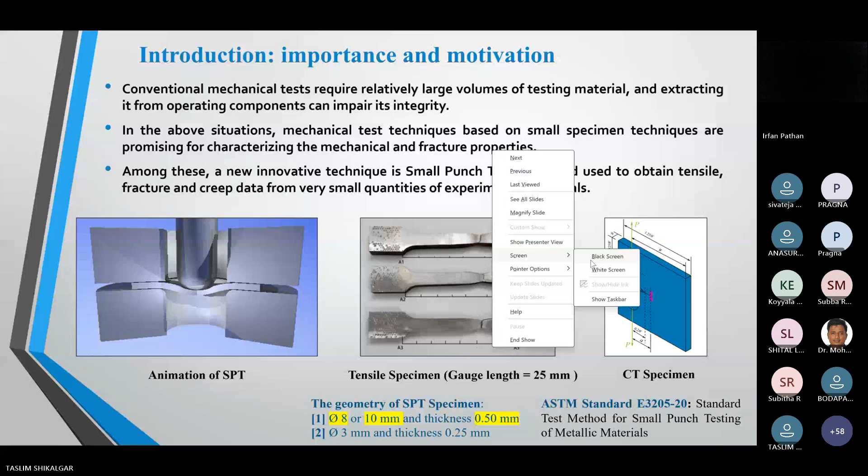This animation shows the small punch test, a disc type specimen having 8 mm or 10 mm diameter, 0.5 mm thickness, which is fixed between upper and lower dies while a punch deforms the specimen. With the help of this deformation, we get experimental data, the load versus displacement data. Many researchers use this data to get the mechanical properties.

Here you can see these tensile specimens, having a gauge length of 25 mm. I want to show a comparison: if we use that much material to get tensile properties compared to SPT, SPT specimens can be manufactured from this type of specimen. More than 100 specimens can be fabricated and tested, and you can generate a parametric study based on these specimens.

Here I took an image from the internet. This is the CT specimen, used to get fracture properties, and these specimens also need more material. So these conventional tests require a large volume of testing material, and if you extract these specimens from working components, it can impair their integrity.

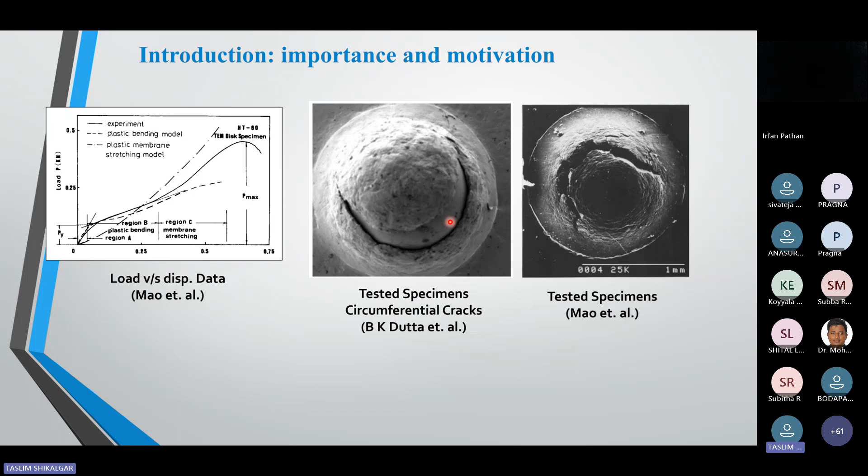Advantages and disadvantages: this type of specimen can be used to monitor changes in material properties of in-service components, and it is easy to perform the experiments compared to standard experiments. This testing methodology can also be used to study changes in properties of irradiated or aged materials.

But one major disadvantage of SPT techniques is the absence of a crack in the SPT specimen. So we are unable to get fracture properties, and there are no exact relations between SPT parameters and actual mechanical properties of the material, like between yield strength and yield load, or ultimate tensile strength and maximum load. There is also no direct determination of fracture properties with conventional SPT specimens, so we are unable to determine damage parameters, which are important to find the initiation of fractures or whether they lead to ductile or brittle fracture.

So now the upcoming methodology is the pre-cracked small punch test. Here, a few researchers increased the dimensions of the specimens from 8 mm to 10 mm into 10 mm, with a thickness of 0.5 mm. They introduced a notch or crack. Both terminologies are used in the literature; sometimes people call it a notch, sometimes a crack. But for a fracture mechanics approach, you need to call it a crack.

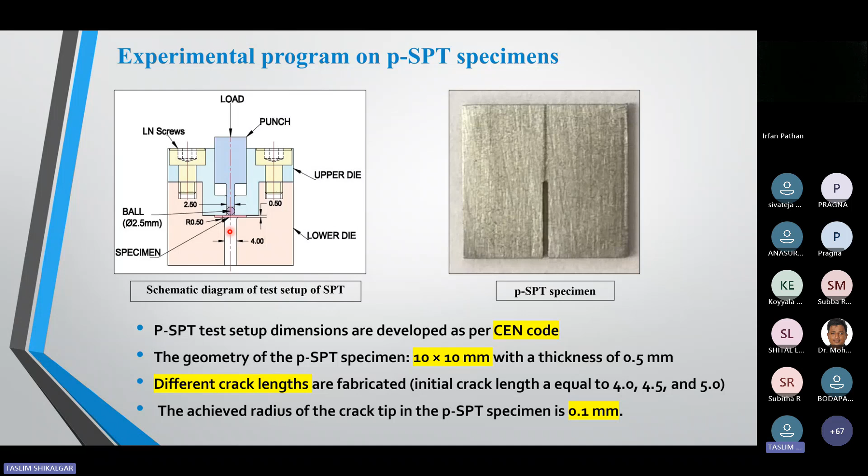Now people are working on this; they are using an endoscopic camera, passing it through the bottom hole to observe how the crack is opening during testing. That is upcoming next time — right now I am also working on this methodology. Next time I will arrange a lecture on how we can utilize this, and I will give more details.

Now we will discuss this. I got these 3 types of results from these 3 types of specimens, and I want to utilize this test data to get the fracture properties. But from this load displacement data alone, I don't have the correlations needed to obtain the fracture properties.

So I cannot use this directly. For that application, I need to first develop the empirical correlation. So based on this data, I need to figure out how I can utilize this test data to get the fracture properties.

So I decided to use a numerical methodology like finite element analysis. I generated a similar FEA analysis model. I meshed the symmetrical model because I cannot use a 1/4 model, since I have a crack in the specimen, so I am getting only a half symmetrical specimen.

I meshed this model, and here you can see this near the crack tip. I meshed using a brick element, meaning an 8-noded element, with a full integration approach.

I did the FE analysis of these specimens with the help of the tensile properties, and then I got the FE results from these specimens, only load versus displacement data. I compared my numerical results with the experimental results, and based on these comparisons, I developed two additional correlations: one between crack length versus peak load, and second, CTOD versus peak load.

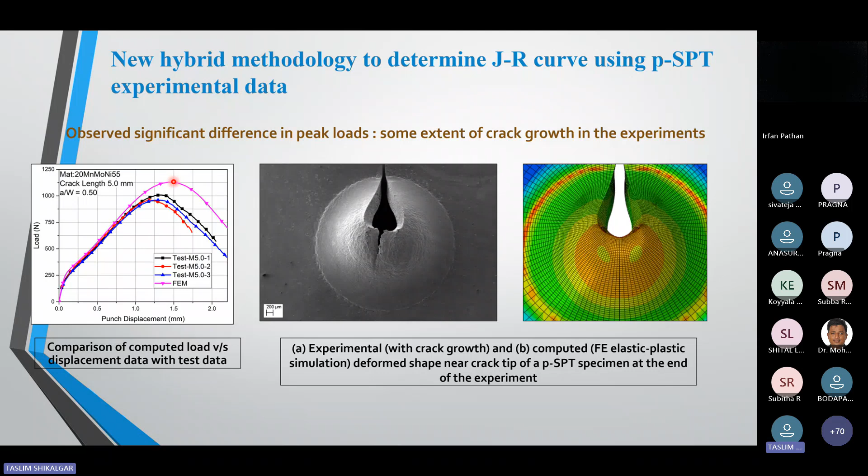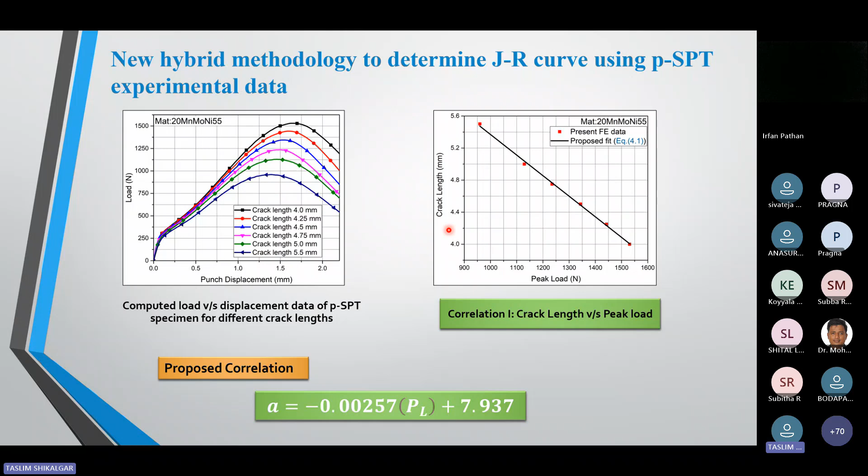If I put this information, like the experimental peak load here, you can see this experimental peak load is always less than the numerical peak load. If my numerical peak load is 1500, I get this crack length, but my experimental peak load is less, so if I go here, I get the maximum crack length. So with the help of this correlation, you can find how much the crack has grown during the test.

Second one is the CTOD, crack tip opening displacement. I want to find out this crack tip opening displacement. This is the methodology available in the literature: near the crack tip, you need to make a right angle triangle, and where this triangle touches the crack flanks, this distance is known as the CTOD. This is the 2D methodology, and I want to use it in 3D.

No software is able to give this data, so for that purpose I wrote additional post processing code. I provided all node coordinates, and with the help of this tip and all node coordinates, I calculated CTOD with the help of one additional post processing code. Here I plotted this CTOD versus punch displacement.

From this, at peak load, how much is the CTOD? I calculated it like this. From this peak load, I am getting the punch displacement data, and for that respective punch displacement, how much is the CTOD? Based on this data, I again generated one correlation known as the CTOD versus peak load correlation, and this is my second correlation.

Here I can get peak load data from this experimental data. I need to just put this peak load data in correlation one, so I will get the crack length, and from correlation 2 I will get the CTOD.

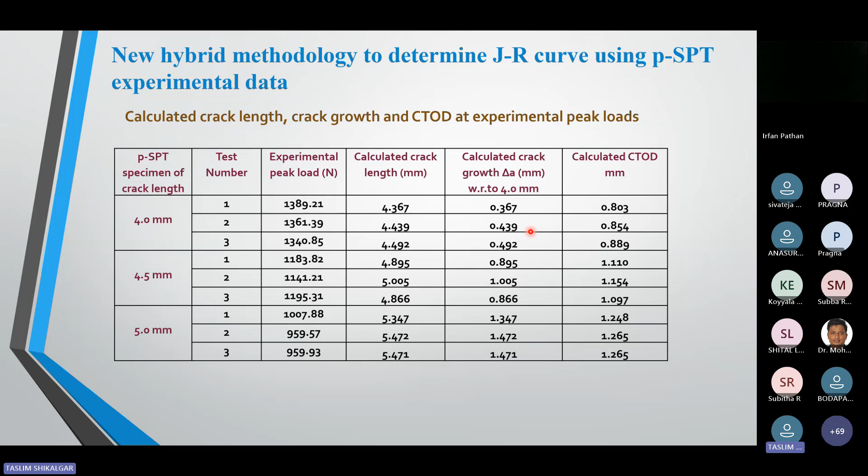This is the calculated CTOD at the experimental peak load. I plotted these points and extrapolated these curves, so I got this CTOD initiation as well as the whole curve as CTOD as a function of crack growth. This is the fracture properties for these respective materials.

These type of curves are available in the literature, but CTOD is famous in European countries, and the J integral approach is famous in America, so most people use the J integral approach. So I converted this data into J integral, and here I used some test data from the literature for the same similar specimen with the help of a CT specimen.

Here is a comparison between the J integral versus crack growth data. I got good correlation compared to the literature data from these PSPT specimens. So this is one of the important challenges I achieved with the help of these specimens, and I published this data in a paper: assessment of the fracture resistance data using PSPT specimens.

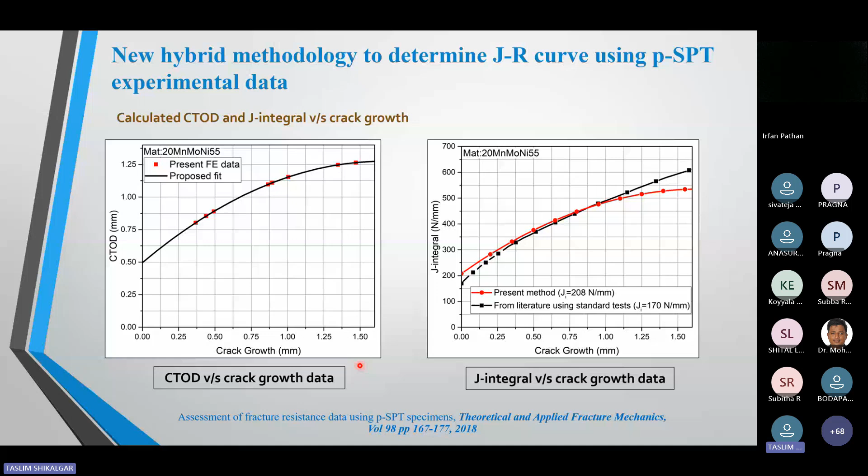Second, I would like to go for the Gurson ductile damage model, which is a famous model available in all commercial softwares for explicit analysis. I want to use this Gurson ductile damage model. I'm not going into the formulas; formulas are available in books as well as in so many literatures on this ductile damage model. I want to tell about the artificial neural network approach, how we can utilize this ANN approach to get the ductile damage parameters.

Initially I assumed some ductile Gurson parameters, randomly 9 parameters, 6 I fixed. I just varied only 3 parameters. I will tell more about it in the next slide, which 3 parameters I varied. I performed so many numerical analyses with the help of Gurson parameters.

To perform this type of simulation with the help of damage mechanics models, I think I need approximately 20 to 30 hours for one simulation. I performed almost 100 simulations to get the load displacement data with the help of this type of damage mechanics model. Here I compared all load displacement data with my experimental data I showed initially, and I observed this comparison is important.

I want to make a range of this experimental data, so my experimental data will fall between the upper and lower limit of the FEA load displacement data. I observed some data is below the experimental data and some data is above the experimental data. Based on this data, I made a database, since I observed that my experimental data is following within a range.

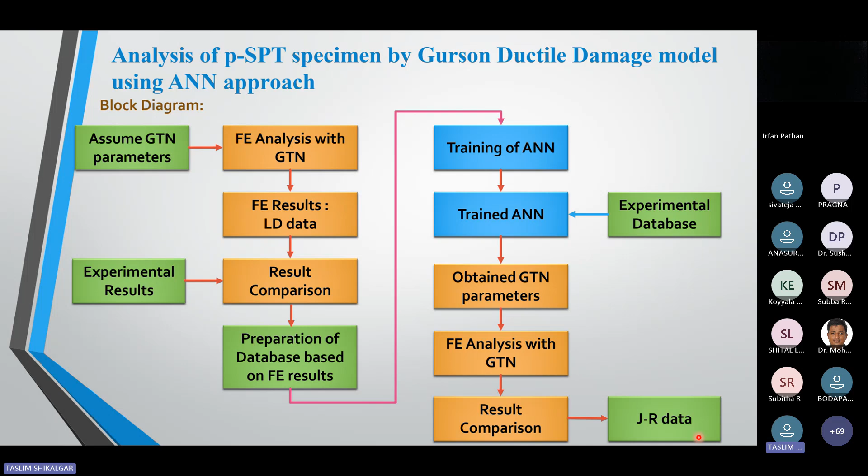These six parameters I kept constant because this is constant for all metals. This is only varying if you are going for materials other than metals. So these parameters are constant for any ductile materials, but three parameters are different.

That is known as fN, fc, and ff. FN is the void volume fraction at nucleation, the second one is the void volume fraction at coalescence, and the third one is the void volume fraction at final failure. So I varied these numbers, performed multiple simulations, and compared this load-displacement data with the experimental data. I observed that my data falls between the upper and lower bound of this numerical data.

So how to generate this database to train this artificial neural network? I decided on punch displacement, and I finalized 11 punch displacement values like this, from this place, this place, this place. Once you finalize the punch displacement values, you cannot change them.

If you change these punch displacement values for the experimental data, then again you get wrong predictions. So I finalized this punch displacement, and for that punch displacement I calculated each load value respectively, and I generated 11 load data points for each simulation.

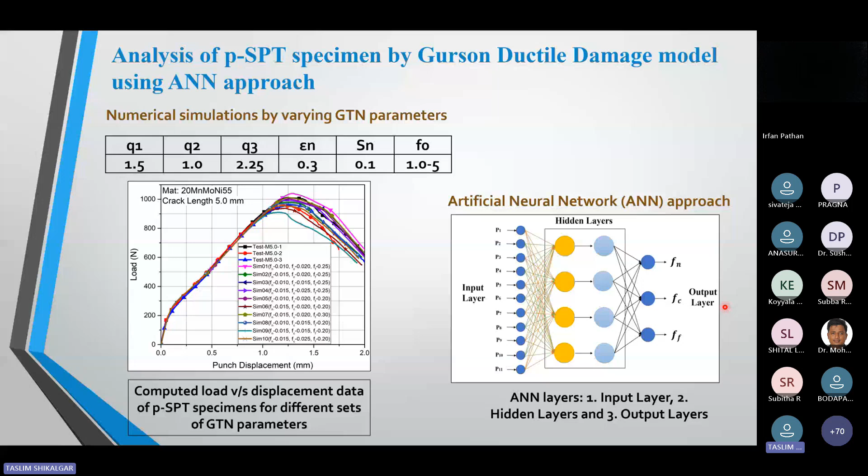I have obtained this here. You can see this, I obtained three different values for three specimens. With the help of these values, I took the average. This is my average value.

This is the net nucleation, coalescence, and I used these three damage parameters to perform the numerical simulations of the 5 mm crack length specimens.

Here you can see this, now my simulation is performing exactly like the experimental results. That is the biggest achievement. I predicted exact numerical results, matching the exact experimental results, with the help of this damage mechanics approach.

So my next task is how we can use these numerical simulations to get the fracture properties. During these simulations, this is the 4 mm specimen, this is the 4.5 mm specimen, and this is the 5 mm specimen. Here you can see, my damage mechanics model gives me this blue color, which is the crack growth observed during the simulations.

So my next task is how I can calculate this crack growth data at the peak load. I wrote a small code to get this. I provided all the numerical node as well as element data to this code to find the crack growth, and with the help of this code I calculated the crack growth in each specimen at peak load only.

This is the crack growth observed during each specimen with the help of these damage mechanics models. I just added the initial crack length, so this is the final total crack length observed at the peak load.

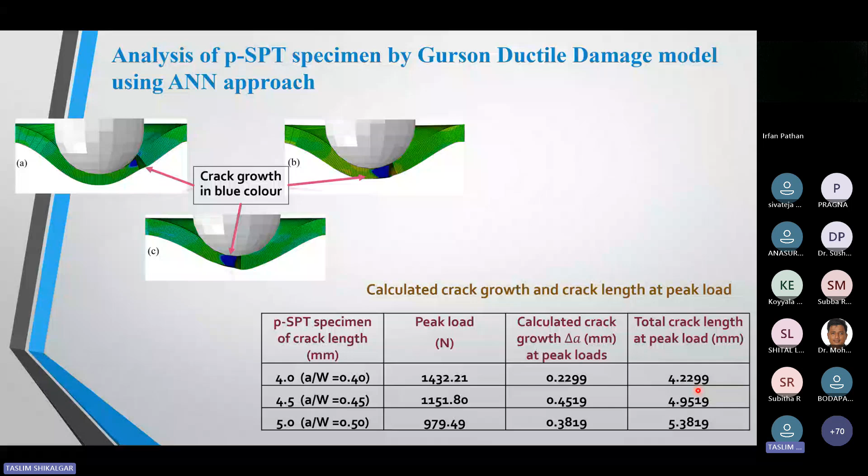Initially I developed these linear correlations without the damage mechanics model. Now I developed similar correlations with the help of the damage mechanics model. So here I got a clear idea, I am getting the same results from the damage mechanics model also.

Second one is how to calculate the CTOD. Initially I wrote similar code to calculate CTOD from the without-damage models. But can I use similar code to get the CTOD from these specimens?

So I started working on this. Is there any CTOD approach available for the growing crack? I studied all papers and observed that this methodology is not available for the growing crack. I would like to tell you more information.

If I shift my crack tip from this location to a new location, and calculate the crack tip opening displacement at the new crack tip, then you will get the CTOD value for the next load as a lower value. You do not get this type of curve.

So this methodology is not available for the growing crack. All researchers decided to calculate CTOD at a fixed initial crack. If the crack is growing, they still do not change the crack tip location. So I used this methodology to calculate the CTOD for the growing crack.

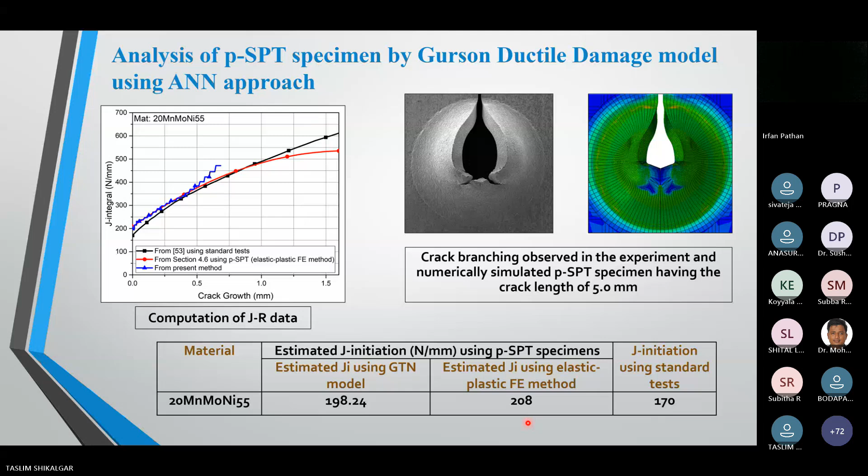At the start of the lecture you told us that once you perform the experiment, the material property gets changed, so we cannot reuse the same test data for the next or upcoming test.

Actually, because when you need to perform any test, you need to handle it properly beforehand. If a newcomer is using a similar methodology to test the specimens, there are chances of getting different load-displacement data for each specimen, because a new person is handling it, so some experience is required to perform this type of test. Otherwise you cannot get repeatability.

And second, regarding this, this approach is useful in the nuclear industry, because the nuclear industry has nuclear reactors.

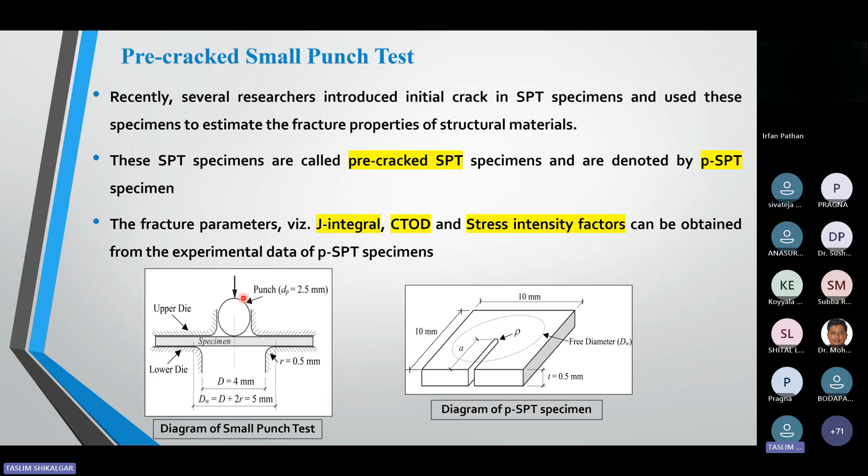If you see this type of specimens like tensile specimens as well as CT specimens, there is no space available to keep these type of specimens. You cannot extract these specimens from this nuclear pressure vessel to find out the exact ongoing properties. So sometimes people fabricate these type of specimens, and when they start using this nuclear reactor, they keep this type of specimen inside the reactor, and every year or every 2 years they take this type of specimen out and test it, so they find out the ongoing properties of the nuclear reactor.

But if you see this, so much space is required to keep this type of specimen. But to keep this type of specimen, only less space is required. You can fabricate a number of specimens, more in lakhs also, and you can keep this type of specimen in the reactor. And each year you can remove 2, 3 specimens from these, test them, and understand what is the ongoing property of the reactor. So you can predict the life of the reactor with the help of these specimens.

So for this purpose, this technique is very useful. Almost all nuclear industries are using this type of specimen. Recently in 2020, ASTM observed that the nuclear industry developed this approach and they are using that approach, so they decided to generate one ASTM standard for this specimen, so anyone in the world can use that ASTM standard to test this type of specimen.

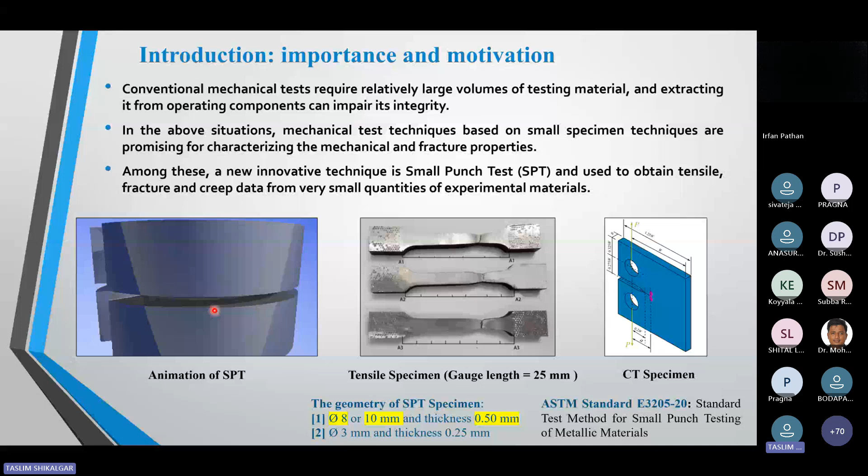Now ASTM is collaborating - this means to do further research, they are connected with BARC in India, and they are taking more data from BARC, Bhabha Atomic Research Center, so they can improve the empirical correlations which are available in the standards.

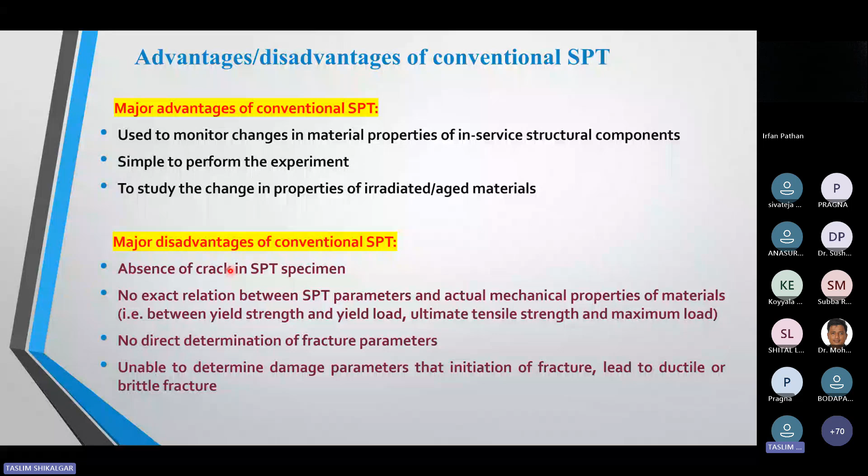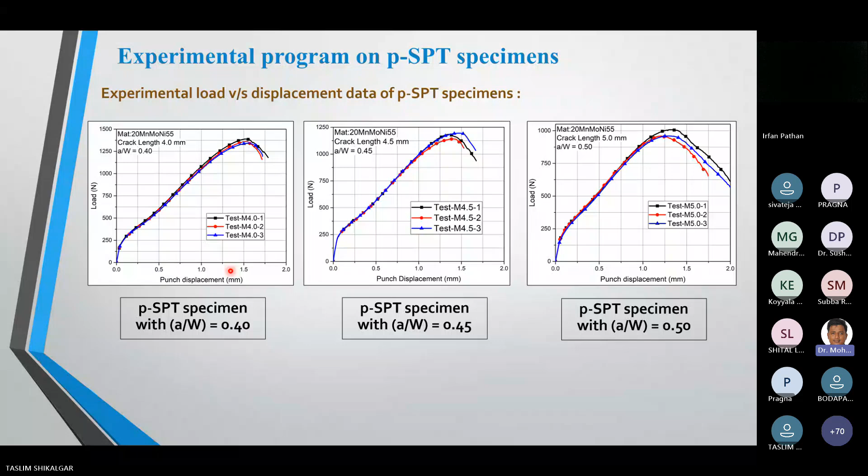What is the material you're testing - 316LN or P91? No, I tested only nuclear pressure vessel materials. There are basically two materials used, 2 to 3. One is T91, second one is 20MnMoNi55, and another available is 304L. In old pressure vessels they used 304L, but now they are using T91 and 20MnMoNi55. These materials have been used since the last 20 years. That research is austenitic, low carbon austenitic steel, 316L, 304L, that category of steel. And the other, P91, means that is a modified 9 chromium 1 molybdenum steel - yes, that category.

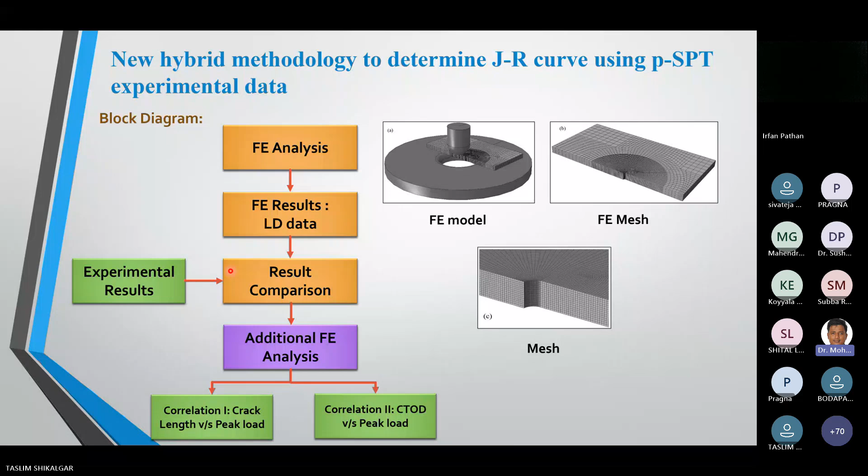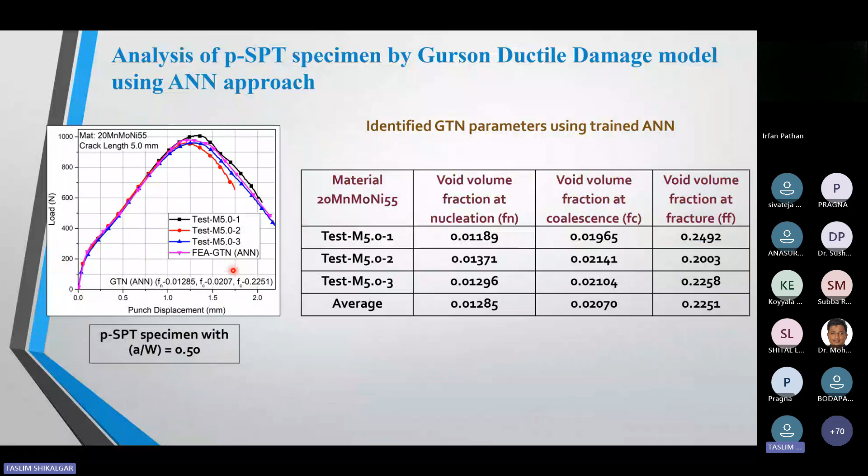Now, an important task - I told about the J integral as well as CTOD. CTOD is the crack tip opening displacement. The second one, the American approach, is the J integral. J integral is the energy release rate calculated in ductile material, which is known as the J integral. J integral is divided into two parts - one is the elastic part and second one is the plastic part. Elastic part is known as the stress intensity factor, which is an important parameter used in brittle materials. J integral is the non-linear energy release rate, which is independent of the path - how much path you use to calculate this ahead of the crack tip, that is also important.

So this type of correlation between J integral and CTOD - these correlations are available only for CT and 3-point bending specimens, which is published in the ASTM E1820 standard. But these correlations are not available for miniature specimens. So I decided to generate this type of correlation, known as the M factor. I decided to find out the M factor for my specimen, the PSPT specimen. So we utilize a numerical methodology approach to find out this factor, because this factor is a function of the geometry as well as the material property.

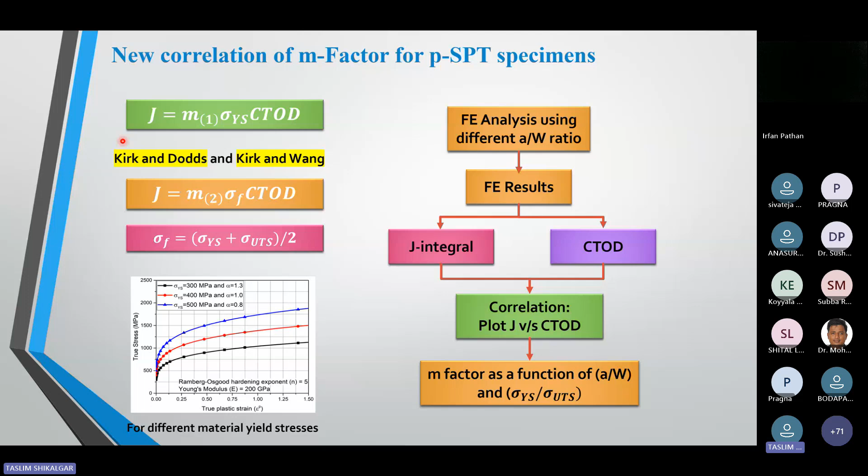So I used this second correlation, and based on this I generated M versus sigma yield stress upon sigma UTS. I observed a linear correlation between these two parameters as a function of A by W. So I proposed that M2, meaning I nominated this as the second equation, I call it M2. M2 is a function of A plus B into this ratio, and I calculated this correlation where A is a function of the A by W ratio, and B is also a function of the A by W ratio. This type of correlation is available for the standard specimen.

I developed these correlations and observed that this correlation is useful. I also verified these correlations with the help of experimental data, and I published these correlations in the Engineering Fracture Mechanics journal, which is my third journal paper regarding the M factor.

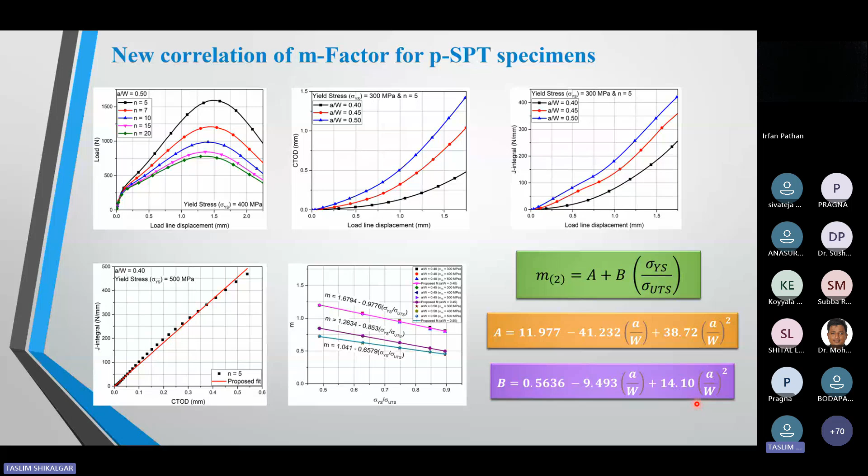So I would like to go for the application of the PSPT specimen.

Major application of this PSPT specimen in the nuclear industry is to study the change in the properties of irradiated or aged materials. Second major application of the PSPT is to get the mechanical as well as fracture property of the welded specimen. That is the upcoming trend.

So people want to find out the properties of welded specimens. Suppose they are making two halves and welding them, and they want to find out how much fracture properties they are getting from this weld. This is the upcoming phenomena, and the automotive industry is using this.

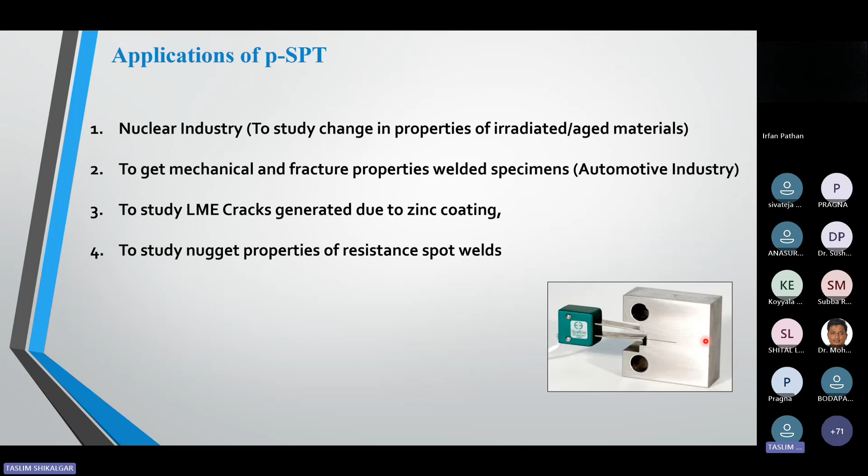Third one is to study the LME cracks. LME means liquid metal embrittlement, cracks generated due to the zinc coating. I will tell more about this also. And to study the nugget properties of resistance spot welds. These are the four major applications of the PSPT.

Second, I would like to show one small video.

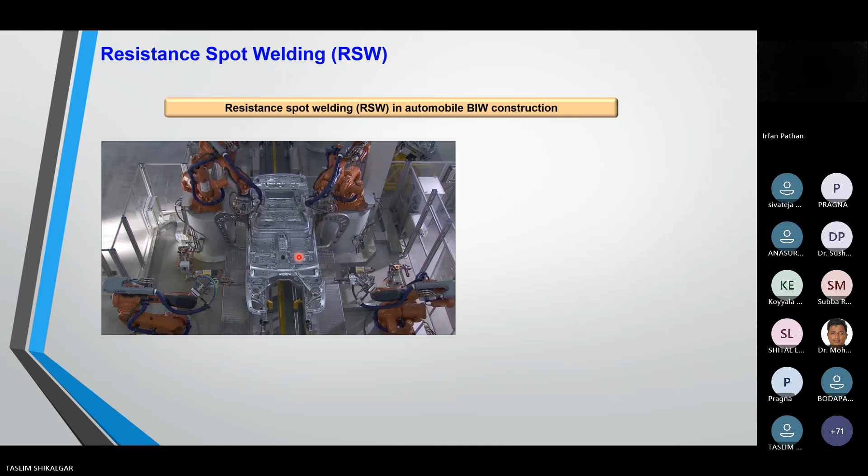If you see carefully, this is the BIW, body in white. All joints of the BIW are made by using resistance spot welding. So these dimensions, if you see this, these are the very small spot welds. So people want to find out what is the ongoing property of the nugget.

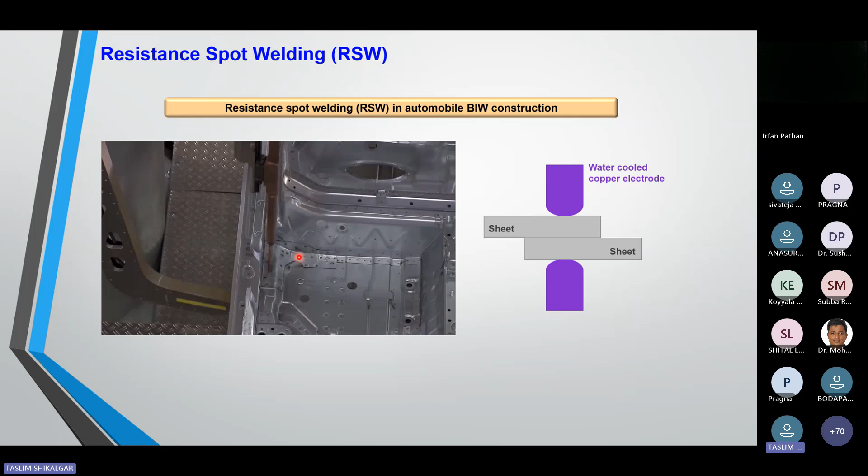Here they are connecting two sheets with the help of resistance spot welding, applying some force and passing some current. With the help of current they are generating this resistance spot weld, and here you can see this weld nugget. People want to find out the exact mechanical as well as fracture property of the nugget. So you cannot use the standard specimen to find out this property.

So this PSPT or SPT is one of the most challenging approaches you can utilize to find out the weld nugget property, because if you see carefully, this type of nugget diameter is approximately 6 mm, up to a maximum of 8 mm diameter from this type of weld nugget.

Second important challenge: the automotive industry is using resistance spot welding, but now all automotive industries are using zinc coated steels. Without zinc coated steel, the automotive industry cannot function. Zinc coating is applied for additional corrosive properties, to improve the corrosion resistance.

But the automotive industry observed some major disadvantages, because during this type of welding, zinc is coated above these two sheets, and because of this current and temperature, zinc vaporizes. After this vaporization, zinc goes directly inside the sheets, and because of the zinc, additional cracks develop.

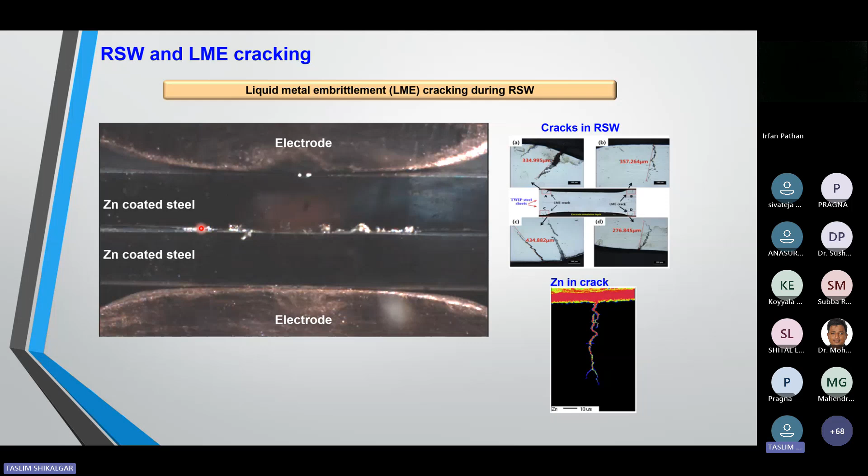So they are thinking how we can utilize and reduce this type of zinc. All automotive industries right now are working on this. Here you can see these type of cracks are generated, and these are the dimensions also you can see here.

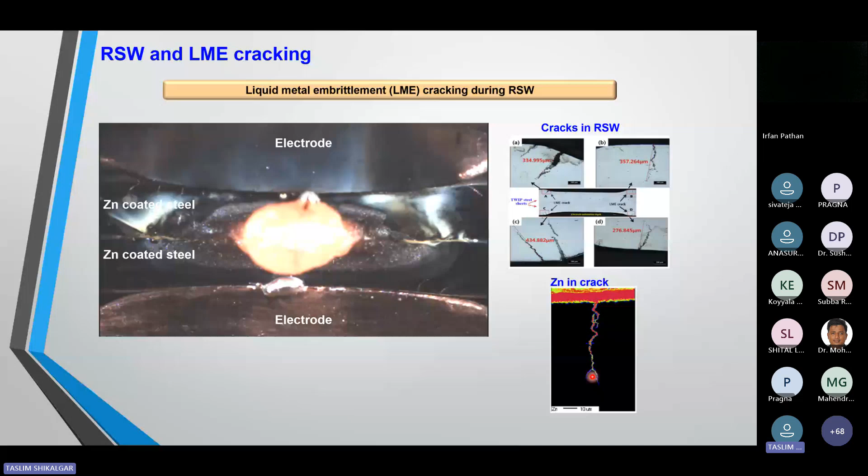So people are just testing this type of specimen, these welds, and how much zinc is deposited inside the steels. They are finding empirical correlations, and how we can predict with the help of numerical as well as damage mechanics models how dangerous this zinc is, and how we can avoid this liquid metal embrittlement during resistance spot welding.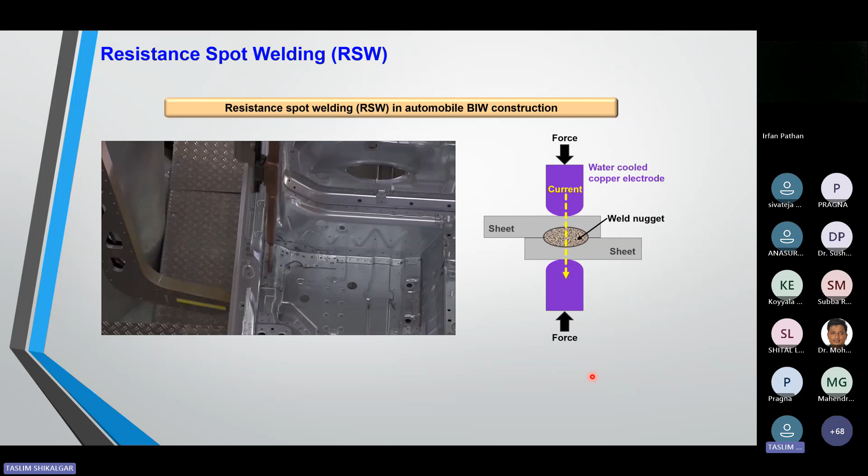In this previous video, you can see so many joints are available, and all joints are made using RSW, and every joint is having cracks. So you can see how many cracks are available in the BIW. That is the important challenge: not a single crack, so many cracks. So people are still working on this.

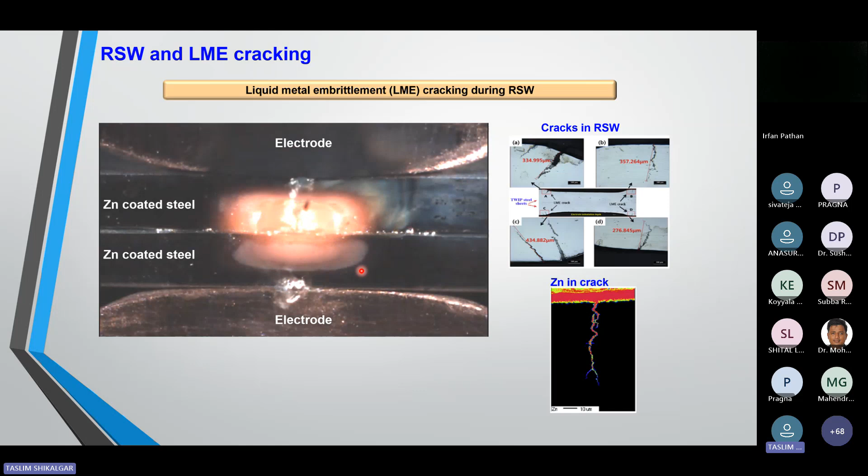So here is one of the challenges: they can make this RSW nugget, and from this nugget they can generate one small specimen, and with the help of the specimen they can find out the fracture properties as well as the mechanical properties.

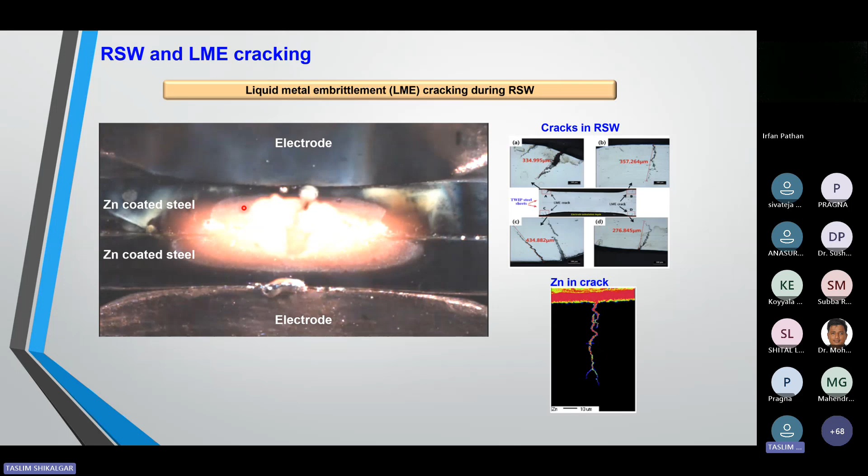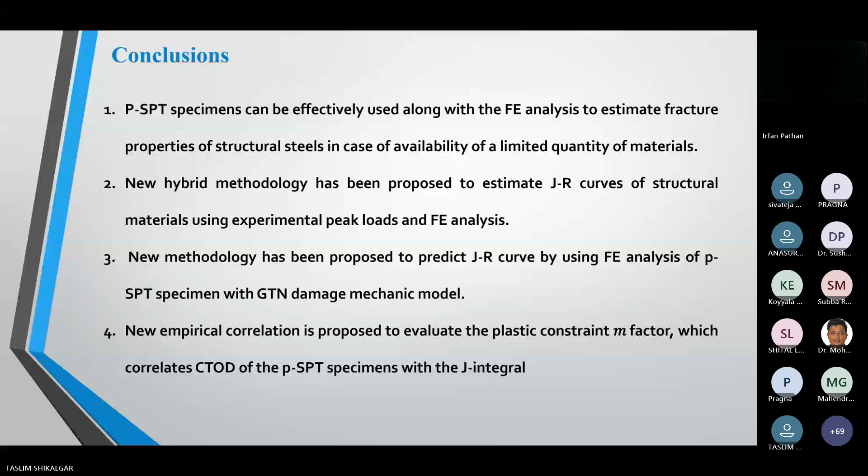Participants, if you're having any question, you can ask your doubts related to the finite element method for fatigue, crack, and other fracture topics. If you don't have any question, it's okay.

I would like to discuss more about resistance spot welding, because as a senior engineer I mostly work on resistance spot welding simulations. I'm doing multiple simulations, and now I would like to tell you more.

One company, MSC company, maybe you know MSC Nastran, that company collaborated with another company known as Hexagon. They developed an additional software known as Simufact Welding and Simufact Forming.

I don't know if you know about these softwares, but they are still in the developing phase. These softwares are very capable of performing this type of simulation, like resistance spot welding simulations for a single weld as well as multiple welds, and they are helpful to perform without needing damage mechanics models.

But right now, yes sir, tomorrow we are having a similar session by Hexagon on Simufact. Mr. Asim will take the session on Simufact, from the same company, Hexagon.

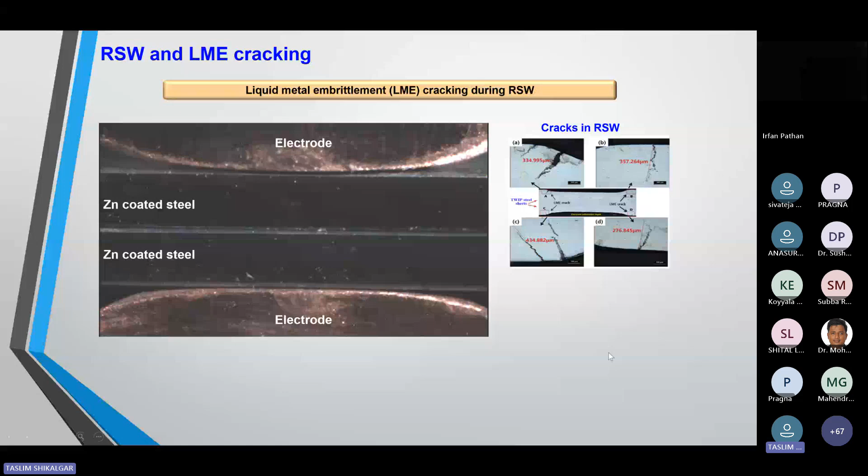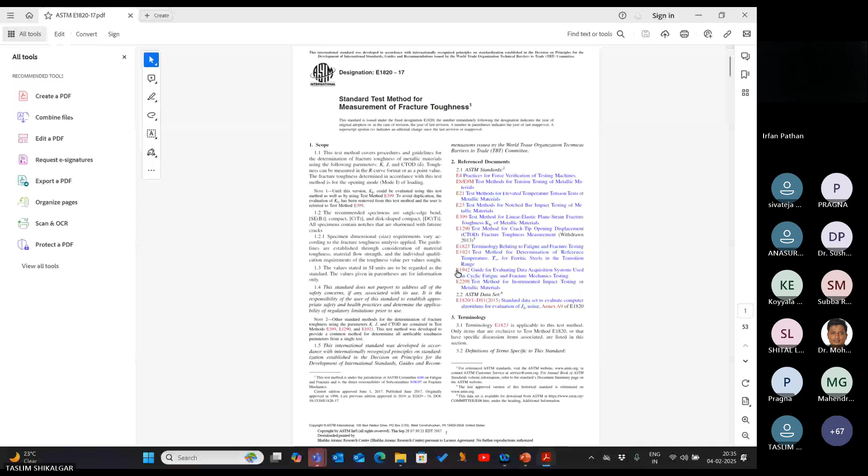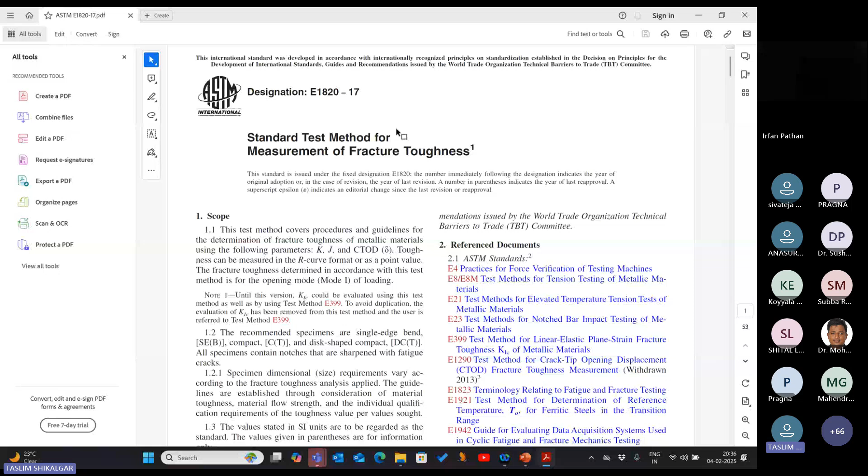One thing I would like to tell you, if you go to ASTM 1820, let me share this with you. Is it visible, the ASTM standard? Yes sir, visible. This is ASTM 1820 standard. They use it to find out the fracture properties of materials.

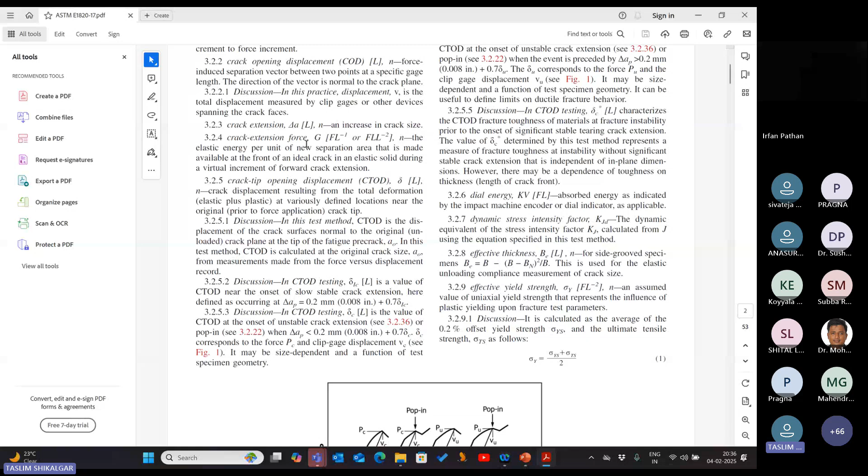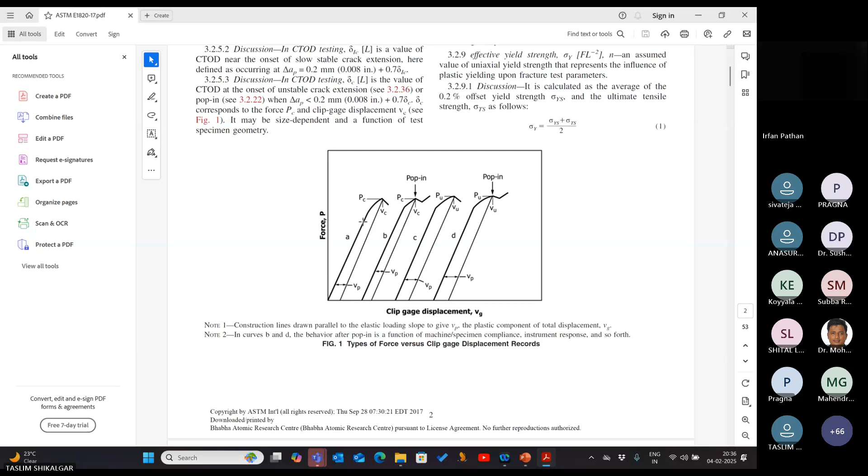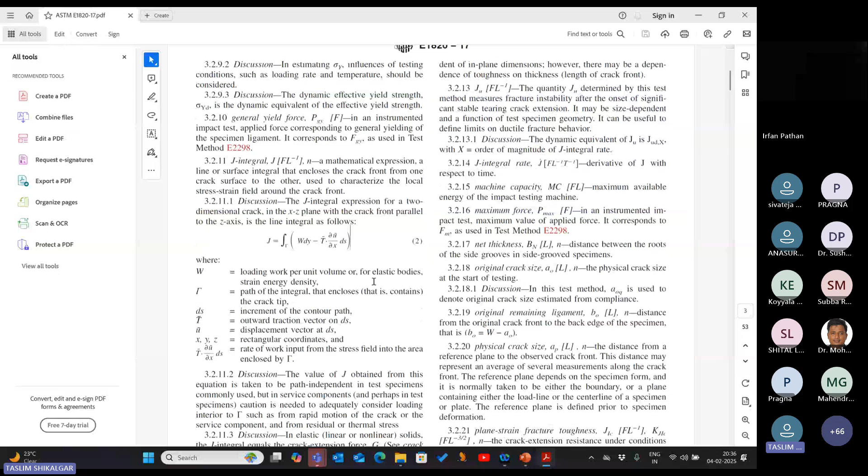If you go beyond this, they give more definitions like what is crack extension, what is the force, what is crack opening displacement, what is CTOD, what is J integral. Here you can see they plotted force versus clip gauge displacement. This is just load displacement data, but sometimes they use crack mouth opening displacement. Here also they mentioned how we can calculate the J integral with the help of this ASTM.

I'm going below so I can tell more about the specimens. Here you can see they use this gauge to find the crack mouth opening displacement. Generally people use load versus displacement data, applying displacement here and load here, calculating global load versus displacement data. But in this approach, they are not calculating the displacement of the specimen, they are calculating the displacement of the crack - how much the crack is opening. And they plot the crack mouth opening displacement versus the load.

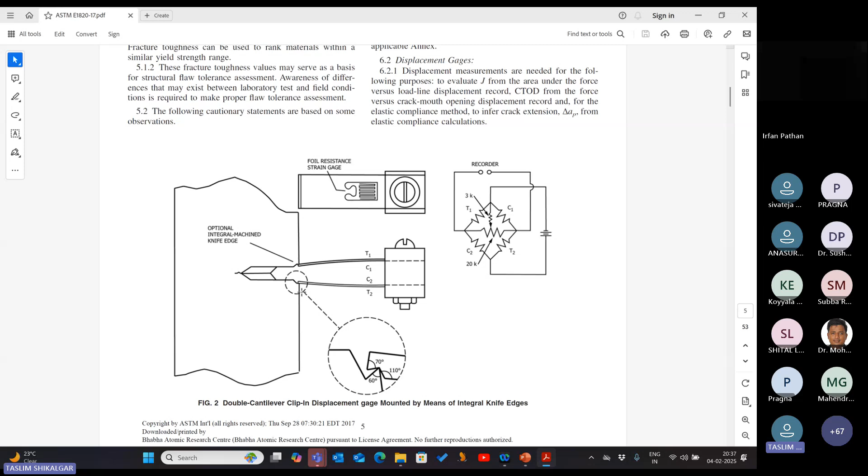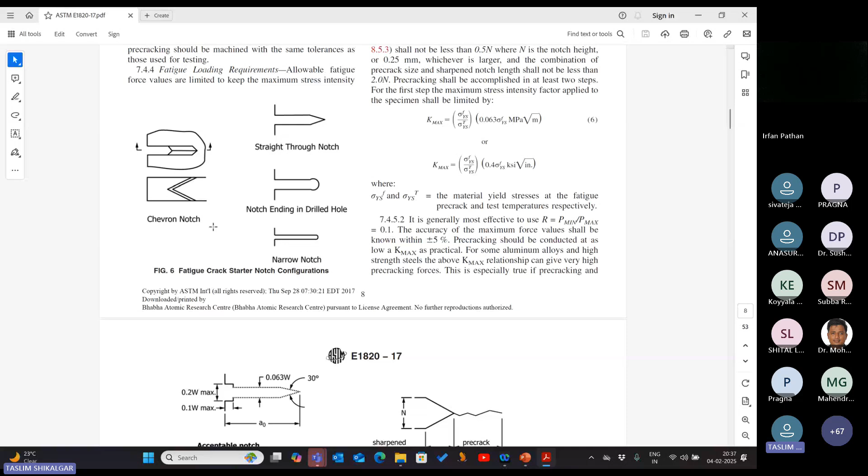Here they show how they can utilize this. One major important thing, they use the chevron notch - a very helpful technique to generate the natural crack. Here is the initial crack they developed, and here they performed the fatigue analysis to develop the natural crack. Natural crack plays a major important role in getting the fracture property.

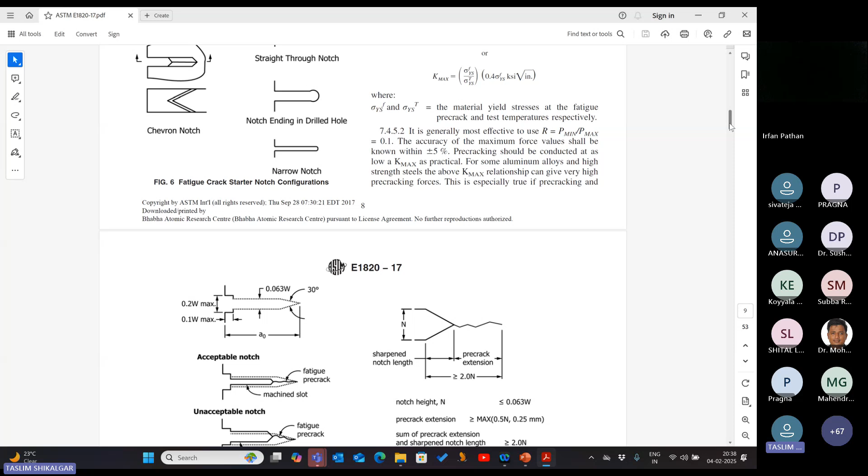But if you see these PSPT specimens, they are very small. You cannot perform fatigue analysis to generate the natural crack. If you perform the fatigue analysis, immediately plastic deformation will happen, so you will get the wrong fracture properties from the PSPT specimens.

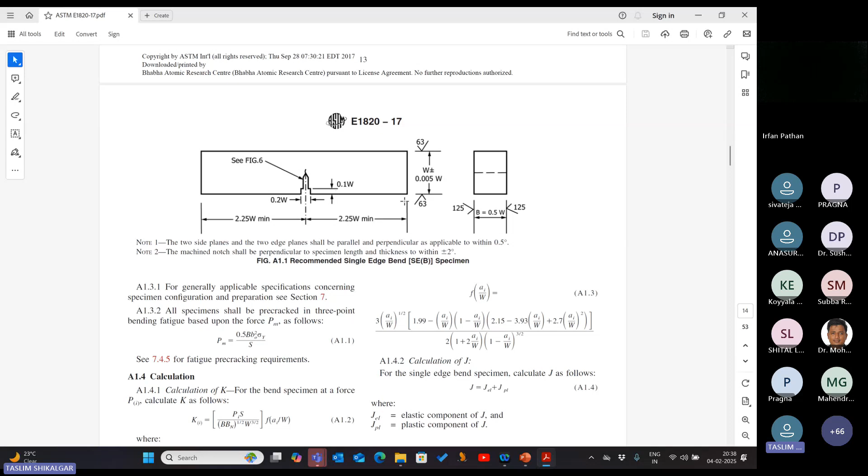Here, this is the 3-point bending specimen. These type of specimens are also recommended to get the fracture properties. They developed some empirical correlations for how we can find the maximum load as a function of the yield stress, where S is the distance, the length between supports of the specimen, and B is the thickness and width of the specimen.

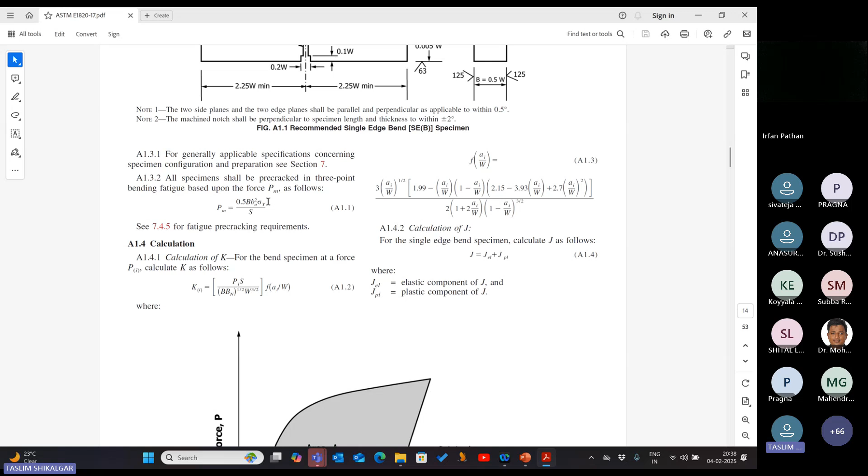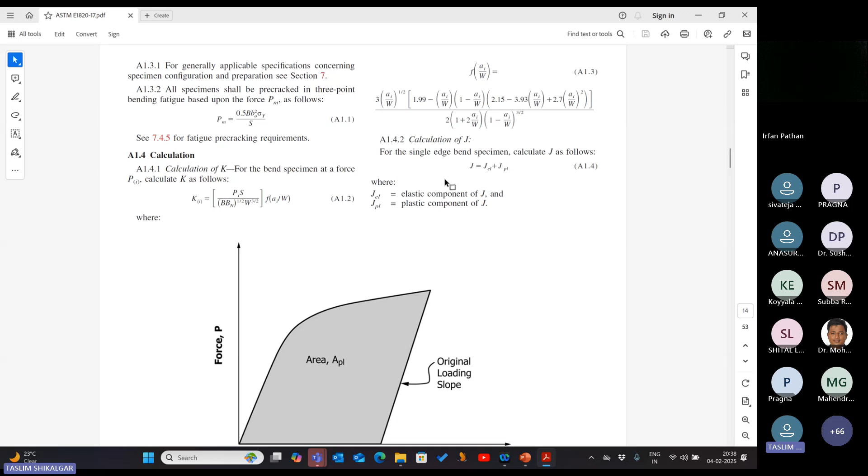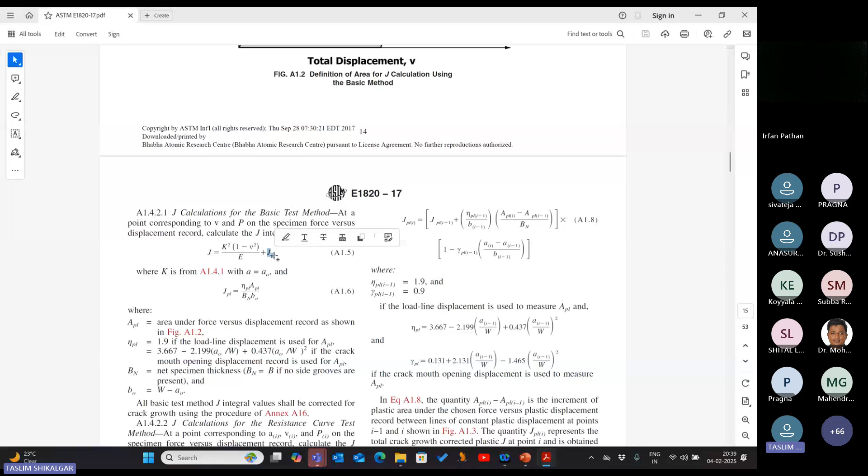From these specimens we get the force versus displacement diagram, and from this diagram they calculate the J elastic and J plastic components. This part is J elastic and this part is J plastic. And with the help of this, J plastic is a function of the area under the curve.

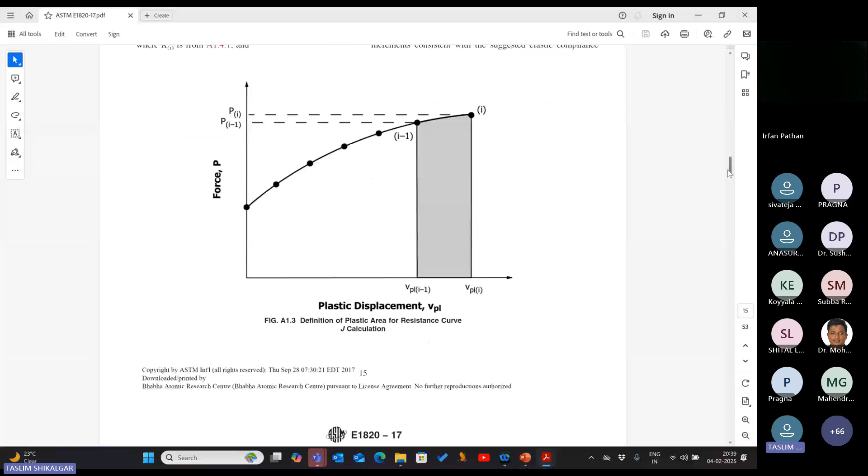And with the help of this J plastic, they generate curves like J-R curves. I think the J-R curve itself is not available, but this type of curve is available - generated with the help of CT specimens, J versus crack extension curve. And this is the fracture property.

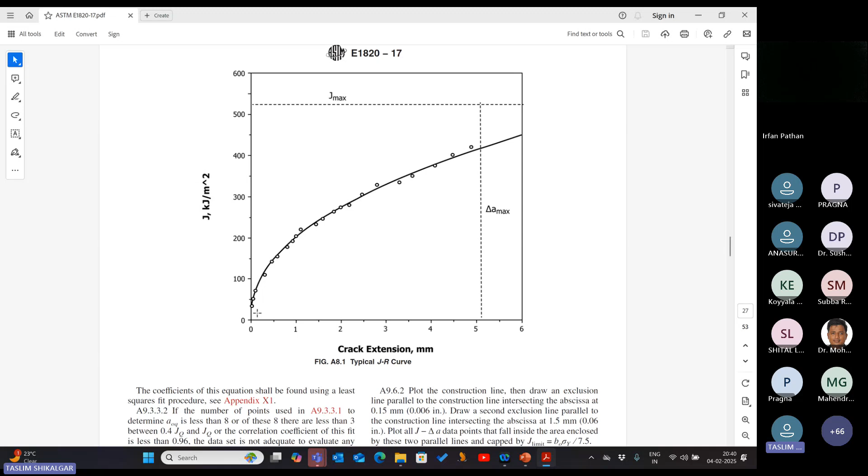So sometimes people don't want these curves. People want this initiation point, J initiation at 0.2 mm crack extension. That is also a useful property, because once crack initiation happens, after that the crack is dangerous. So people want to know how much is the J initiation. Sometimes industry uses only one value to recognize if the specimen is safe or unsafe.

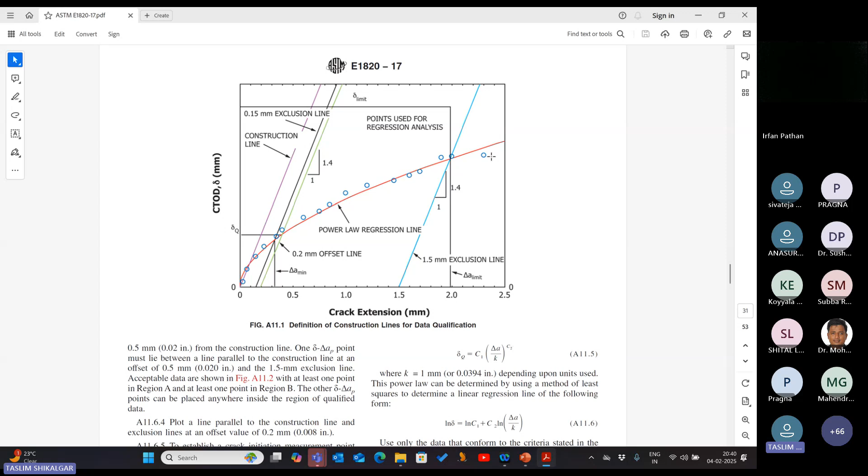So similarly here you can see the CTOD versus crack extension. People generated similar curves, but they used some correlations because ASTM does not directly propose how to calculate the CTOD. They are proposing to perform the J integral approach only.

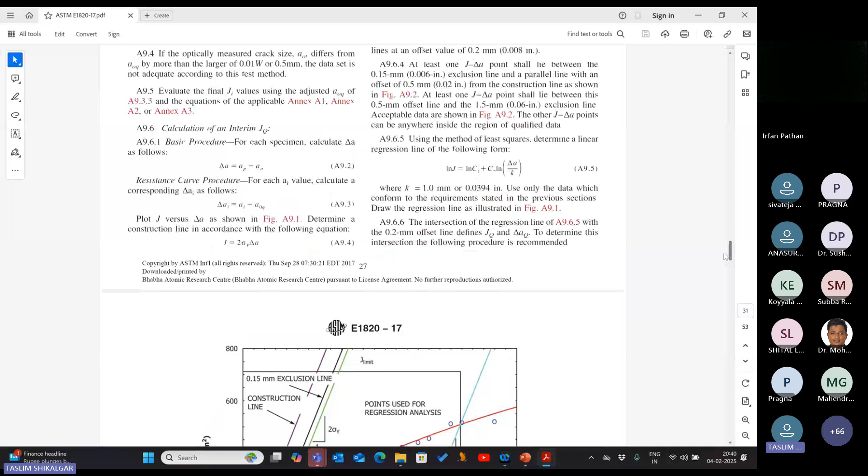There is one correlation available, similar to this. I just proposed a similar correlation, like J and CTOD relationship, using the plastic constraint factor, which is a function of sigma ys divided by sigma uts, and 4 constants A0, A1, A2, A3. This polynomial equation is available.

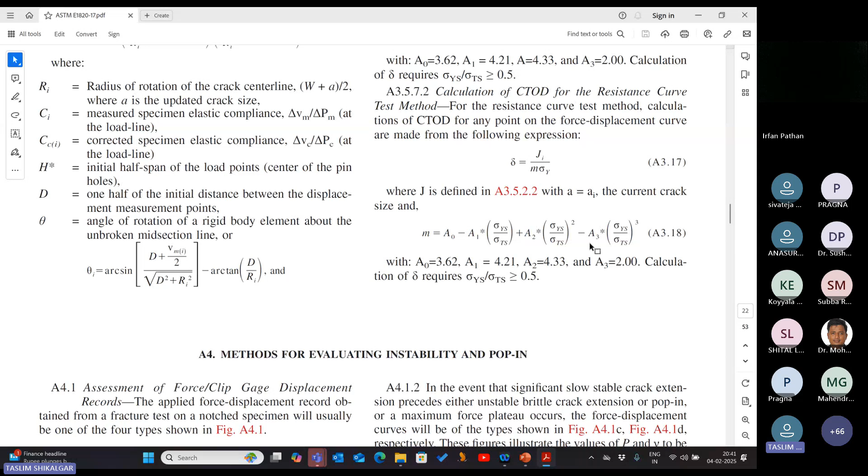In a similar way, I developed correlations for PSPT specimens. Now ASTM is also referring to my papers, but they are testing this type of correlation for multiple materials. They want to know if it is valid for all materials. If not, they will find the polynomial constants for all materials.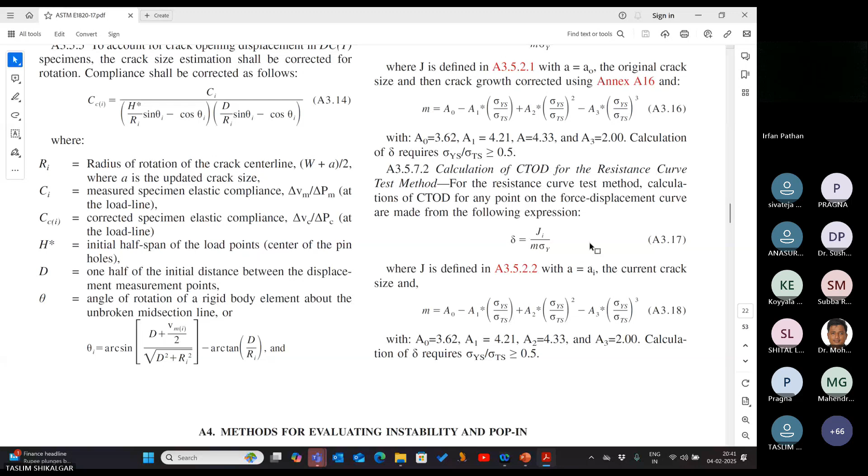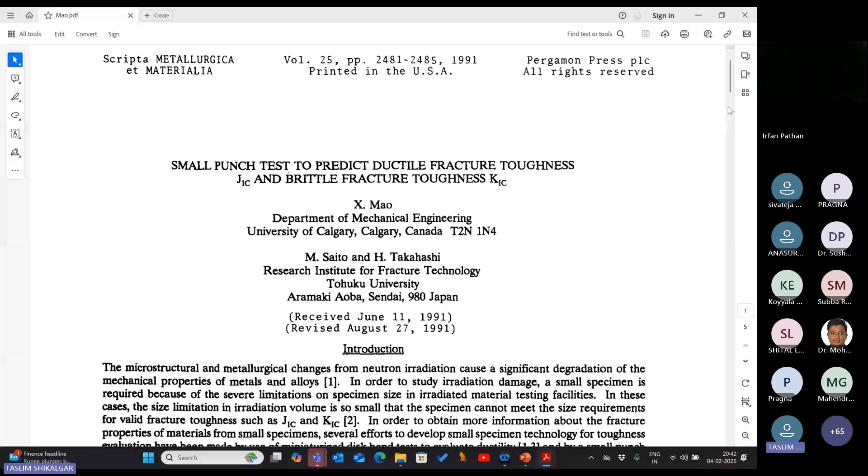I would like to share one more piece of information, just for reference. This is not a new technique for SPT specimens. This paper was published in 1991. Mao, X. Mao published the first paper using the small punch test. That is almost 30 years old methodology, and he developed this type of specimen.

I think he developed the first fixture for these specimens. He tested this type of specimen and generated load versus central deflection curves. With the help of this curve, he calculated JIC as a function of the equivalent fracture strain, sometimes called biaxial fracture strain.

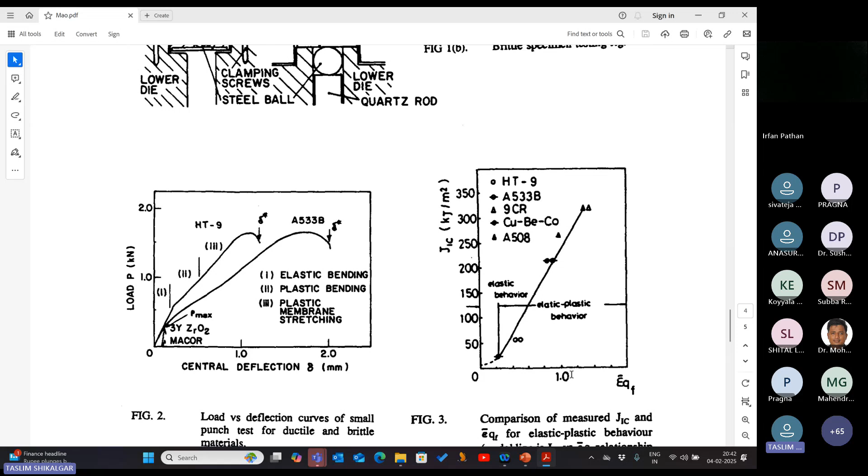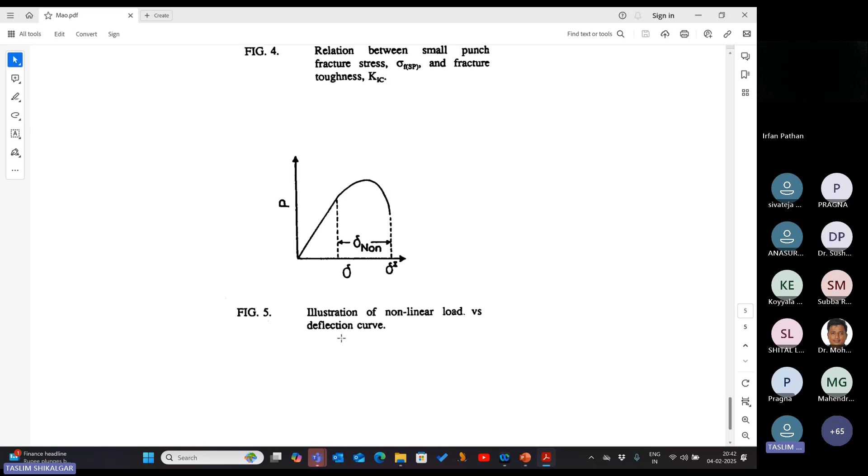So this journey started in 1991. This author published 3 papers regarding this SPT approach. He published a second paper in 1992.

Here also he fabricated this type of fixture, very robust. He wanted to measure the dimensions of this type of specimen, so he couldn't measure at a single location. He measured at 5 locations and took the average of these 5 locations, and that became the final dimensions of the specimen.

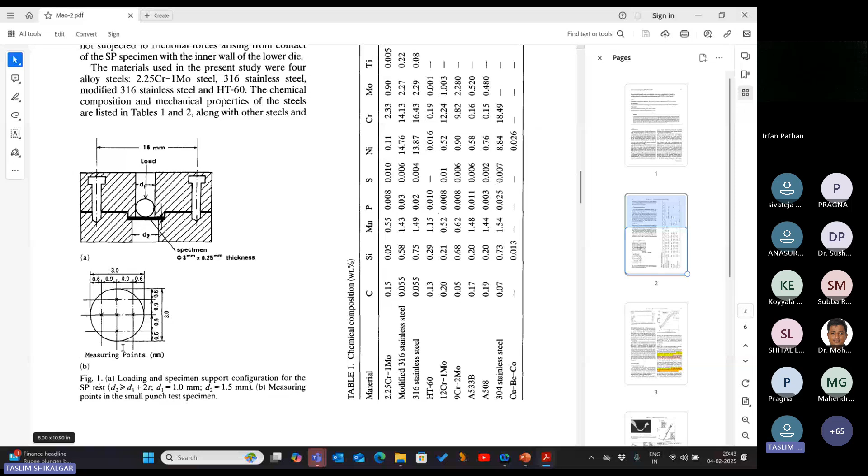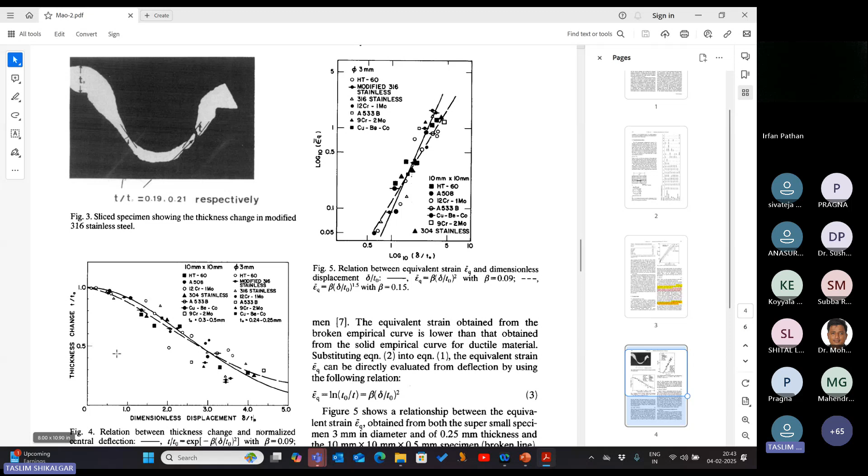He tested multiple specimens of stainless steel 316, and with this he found one non-dimensional number: the thickness change, final thickness upon initial thickness, and the deflection of the specimen, central deflection divided by T0. This is a useful methodology. Still, people are using this non-dimensional number to find out material properties.

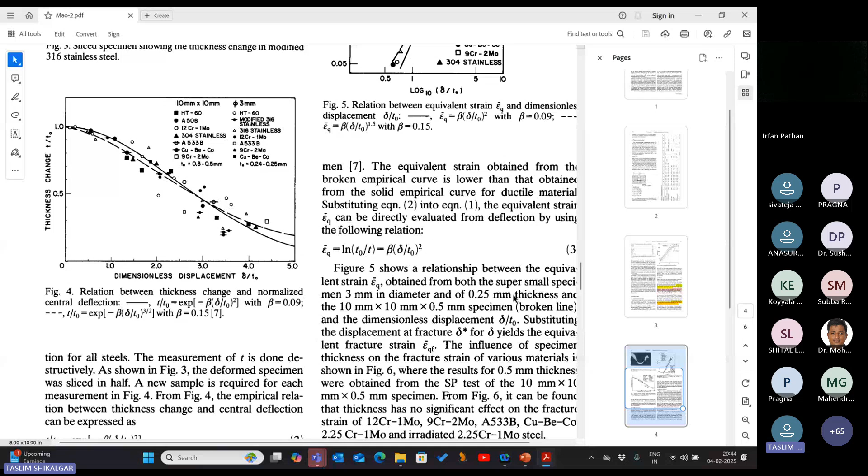And this is 30 years old. Still, if you search on Science Direct, you will get 50,000 papers available on this small punch test. But people still use the same approach developed by Mao, the same type of equations. Only a few beta values may be different for different materials.

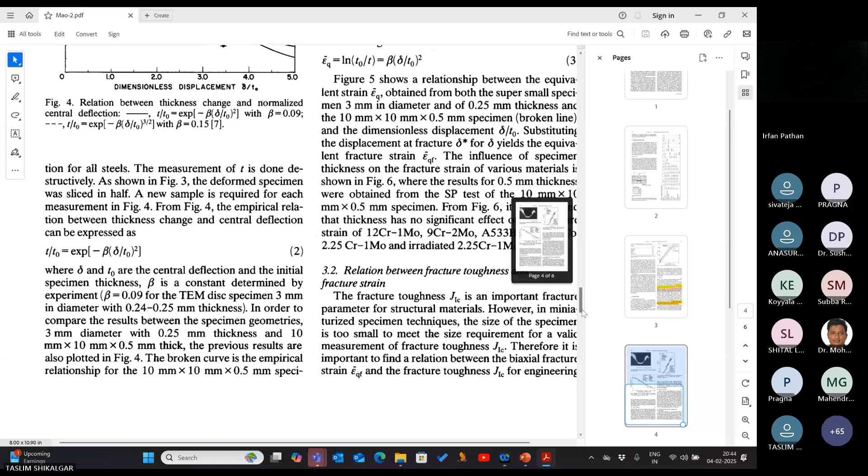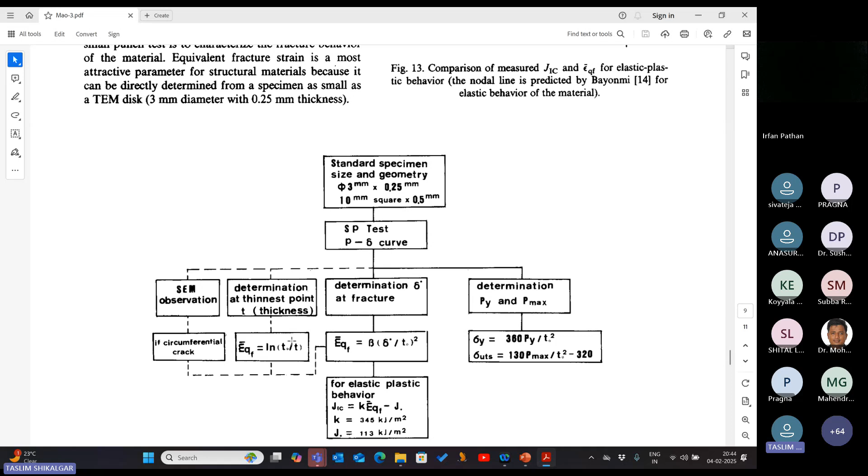And in one paper, he showed how we can use this approach to get fracture properties. He calculated the equivalent fracture strain, like ln, natural log of initial thickness divided by final thickness, and plotted it as a function of the J integral. He calculated K and C like a linear equation.

With the help of this, he tested so many materials. So with this specimen, you can easily get the JIC. This is an old approach, but it is a very interesting one that he developed 30 years before.

During my PhD, I started this literature survey and observed that these papers are very useful. I noticed that very few people, only 1 or 2 authors, used the SPT approach to find mechanical properties. So I decided I could use this specimen to find fracture properties, and I started my research journey. I've published 6 papers and 3 book chapters based on this, and I am still working on this fracture mechanics approach.

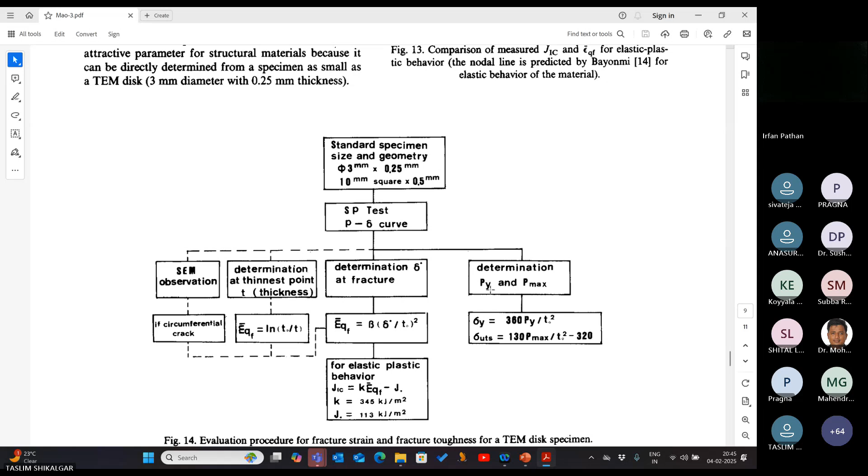No, I don't have a simulation because I added only experimental videos, since I am working for industry, so I cannot share that data directly with you. I'm just telling you that this type of simulation is performed with the help of the Simufact Forming or Simufact Welding tool.

And now these tools are very capable of finding the exact location of liquid metal embrittlement cracks. They developed a methodology for how we can provide the coating data to the simulation, so with the help of the microstructure, the simulation automatically shows the location of the LME cracks.